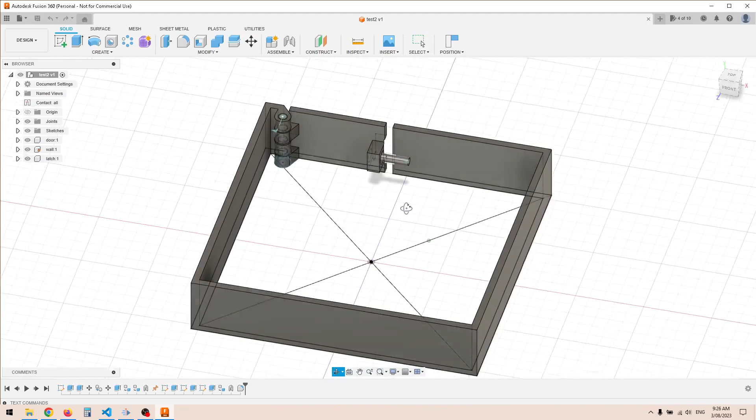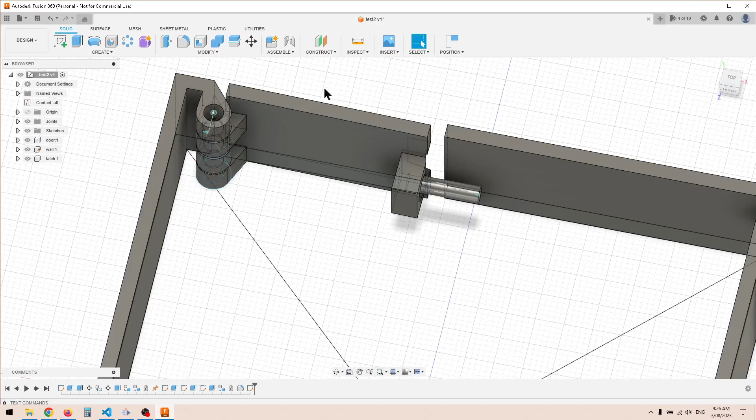Design something that looks like a box, without a bottom or top for now, we can do that later. It depends on the position of your geometry. You can move it around and actually limit its position for the piston, the door, and the wall, using a hinge. Now, how are we going to do that?

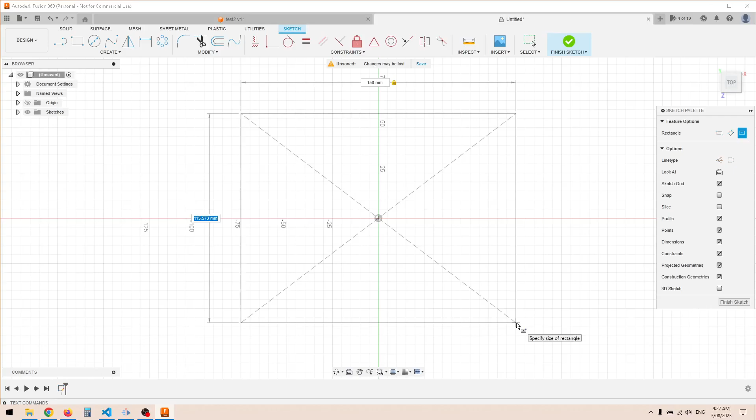So let's start a new Fusion project. Create a sketch and create 2 rectangles of size. Now it has to be a little bit wider for the solenoid to be placed inside, so let's make it 150 wide, and I'm just going to make it 100 height.

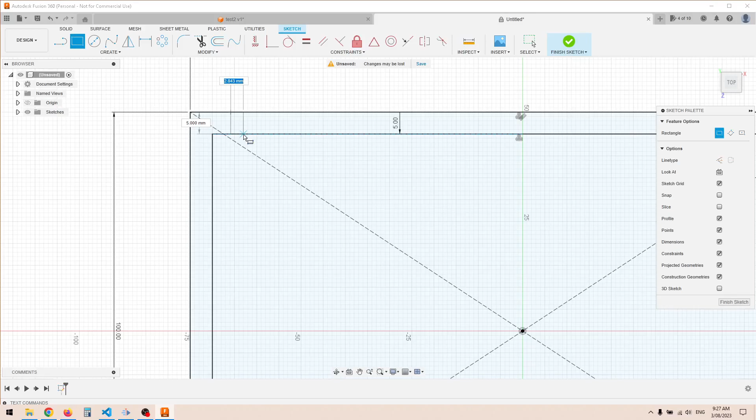Long, okay, and then do another. You can do a shell offset, so do an offset of let's make it a 5 mil box, and then create 2 rectangles inside.

Now this will be the opening for your door, so I will need to make it a 2 mil gap, and the other one, let's make it a 2 mil gap. Now the second gap should be wide enough for you to place your item, but do not obstruct the solenoid. So I'm just going to place it somewhere near the middle. Now we can adjust that later on as well.

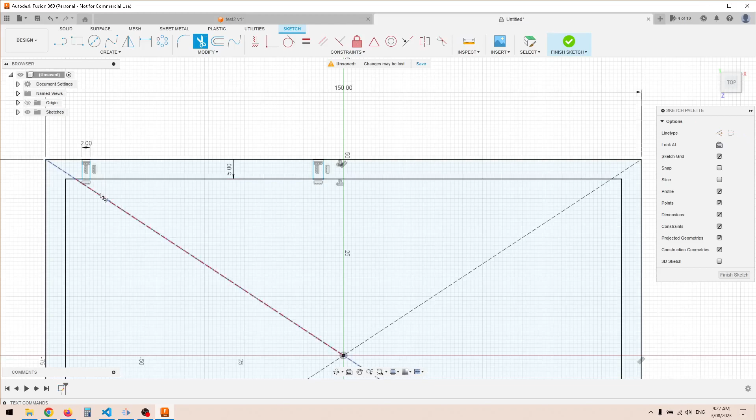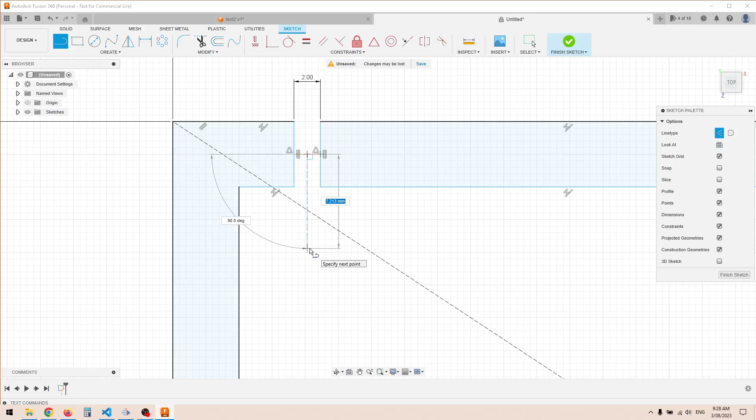Use a trim tool, cut off the connections between the wall and the door, like this. And we create a construction line between the midpoints, and also the midpoint down to the perpendicular side. And I'm going to make it a 7 mil and create a solid circle.

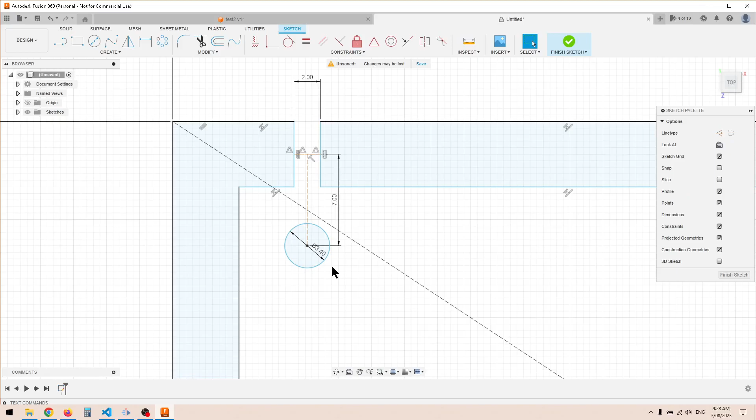Okay, and we want this circle, the first circle, to be able to fit our M3 bolts, so it's a 3.4 mil circle. Make sure the construction is unticked, otherwise it will be a dotted line. And make the second largest circle about 6 mils in diameter.

This will give you a shape that contains the bolt. Now let's connect the door and the wall shape here. Now I'm going to make it a little bit closer this time, somewhere like here. Let's make it at the middle here. So now I have one line here and a line here.

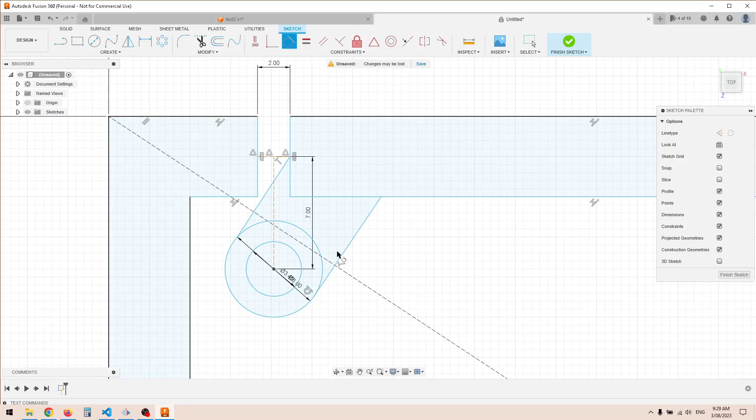I can use a tangent tool to specify the relationship between the line and the circle, so it's now tangent. Click and click. If I do the same on this line and the circle here, it makes it tangent as well when it does not overlap or intersect any part of the wall. Okay, that's what I want.

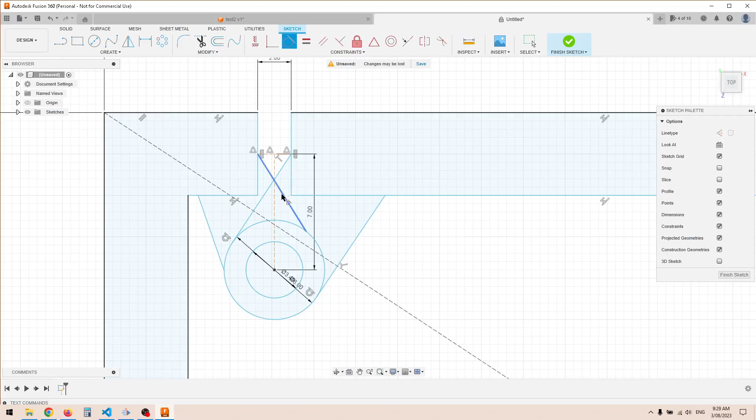Do the same on the other side. So circle, and then you can find the tangent point. If you don't, you can specify later, like me. So the dot here and the point, and then do a constraint line circle, line circle. Okay, that will make up the tangency there.

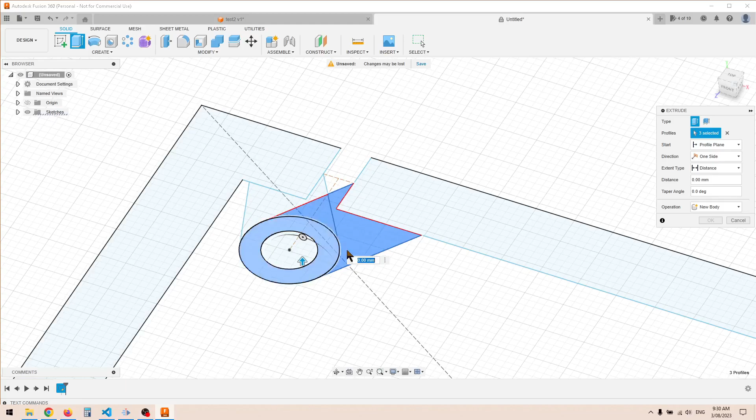Finish your sketch. Select multiples, and then extrude. So what I did was holding down the shift key or the control key, and then select them, and then extrude. Press E, okay, I extruded for 5 mils.

Now after extrusion, your sketch disappears, so go back and open up the sketch folder. Unhide sketch 1, because I'm extruding the other side.

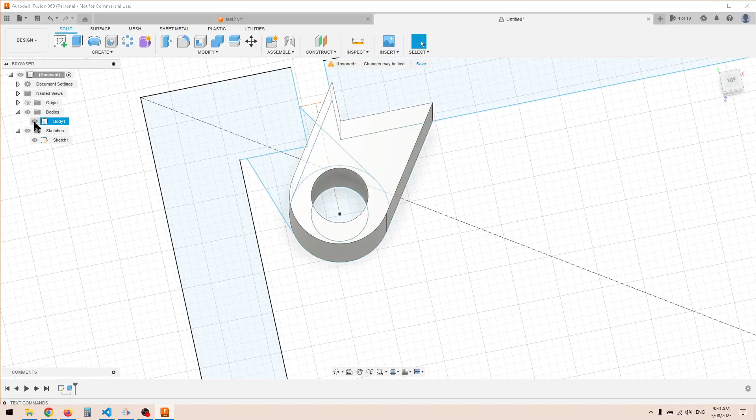So I want to hide the body. Select, oops, extra selection on that line there. So hold the shift key or control key to select all the faces. Extrude, press E, 5 mils, and then unhide body 1.

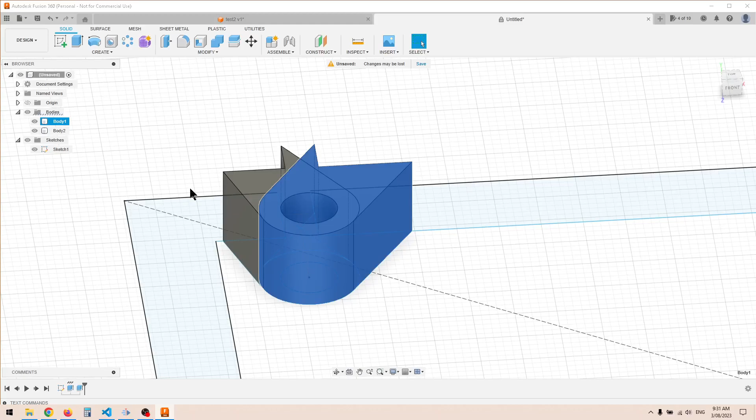Now you can choose body 2 or body 1 to move up. So I'm choosing body 1. Press M and move it vertically for, let's choose the distance, 5.4 mils.

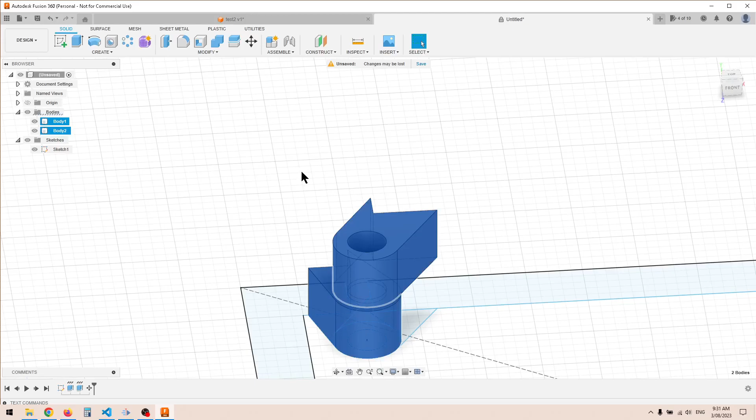And we want to duplicate body 1 and 2. So select 2 of them on the component tree, Control C, Control V, drag it upwards. Now this will decide the height of your box, so this number is up to you. If you want to make it taller, you're gonna make it higher, but I'm just gonna make it minimal, like let's make it 18 mils.

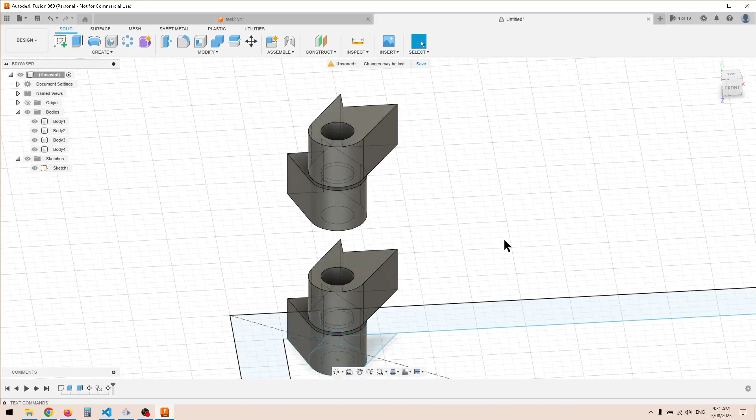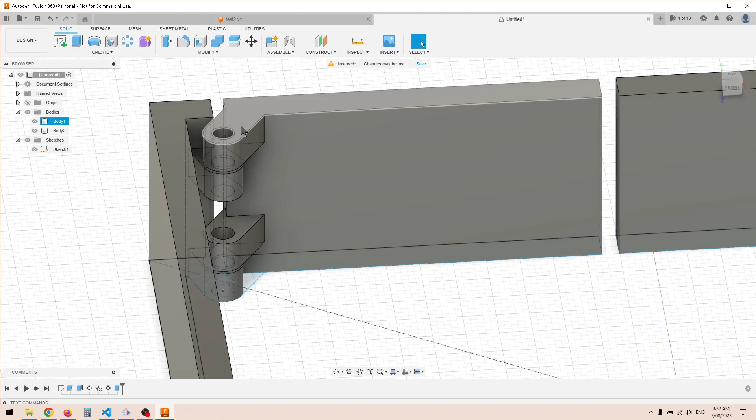Then I choose the door sketch and the wall sketch. Press E to extrude. Now pull it up, or you can actually snap to the top hinge over there and click on OK. This is the join extrusion, so it actually joins with the existing hinges and creates an automatic link between them.

It just creates a single body. Okay, now you end up with 2 bodies. One is the door with a hinge, and the second one is a wall with a hinge.